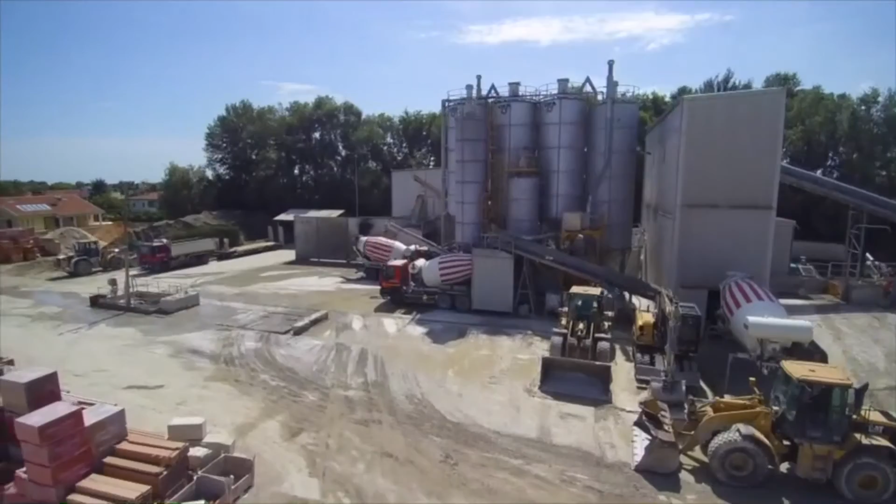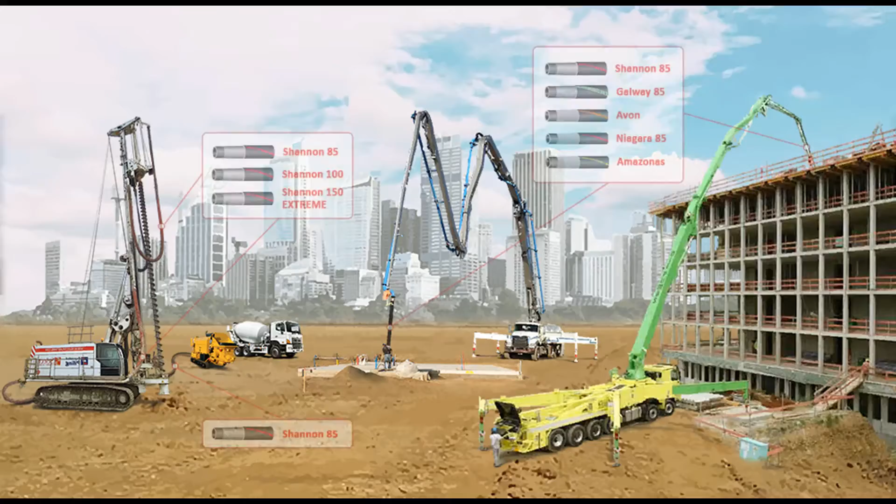Morning, everybody, and welcome to this second appointment with our flexibility project. My name is Claudia Buono, and today, with my colleague Fabio Lazzarin, we'll bring you into the world of construction and concrete.

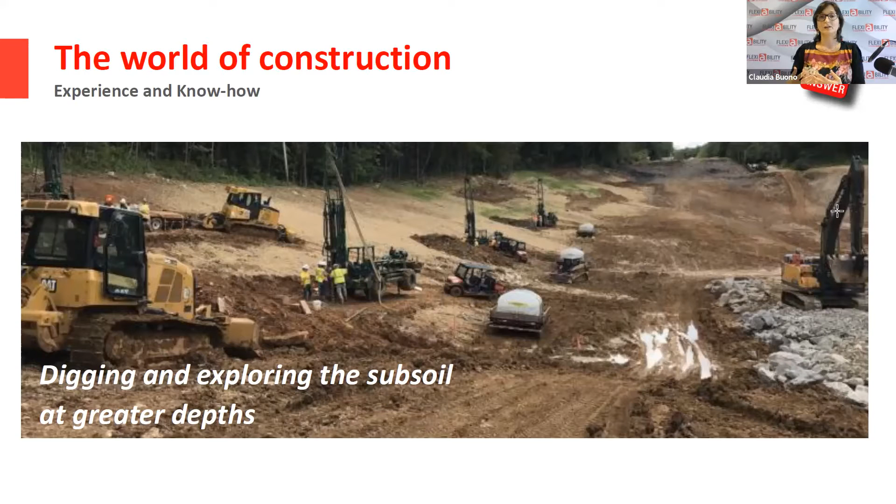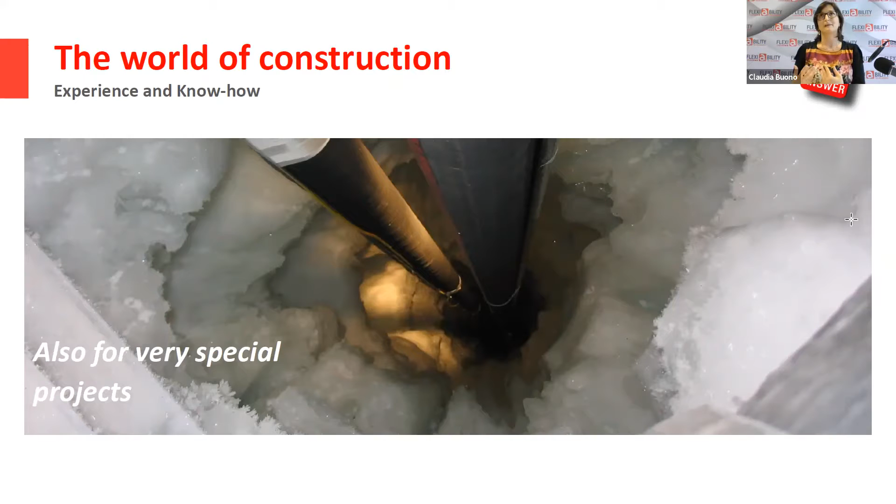So whether you work in the world of construction or not, you have for sure noticed that in the last decades, the tendency on one side is that of building taller and high-tech buildings. But on the other hand, mankind is always eager to explore the dark of the subsoil. To do this, sometimes basic knowledge is not enough, because specific projects, knowledge and know-how are required. For example, the slide you are seeing now shows what we can maybe call ice piling.

So when you think in general about the world of construction, you don't only have to think about simple concrete pumping, but also other applications, like ground foundation, piling, drilling, and to a certain extent also the world of quarries and mines. But this is actually a separate issue. So when we talk about hoses for abrasive material, you don't only have to think about concrete and cement, but an abrasive hose can convey other types of materials, like sand, mixtures of wet and dry materials, drilling mud, chemicals, waste of rocky products and debris, and also compressed air and water. And this is why in a construction field, you won't only find concrete hoses, but also what we call accessory service hoses.

So at this stage, you for sure have understood how important it is to recognize and choose the right rubber hose manufacturer able to grant you the highest quality hose for a smooth and long service. And what are the characteristics this manufacturer shall grant you in the production and supply process? First of all, vertical integration. It should be able to control the chain from the beginning to the end, which means from the raw materials to the finished product. It should be able to produce your hoses in a dedicated department. It should be able to grant you some stock, because we all know how demanding construction people are, and when they ask for a hose, they really need it quickly. It should be able to guarantee the complete assembly, therefore not only the hose, but the end fittings and the safety systems, if any. It should grant you the possibility of customizing also small batches.

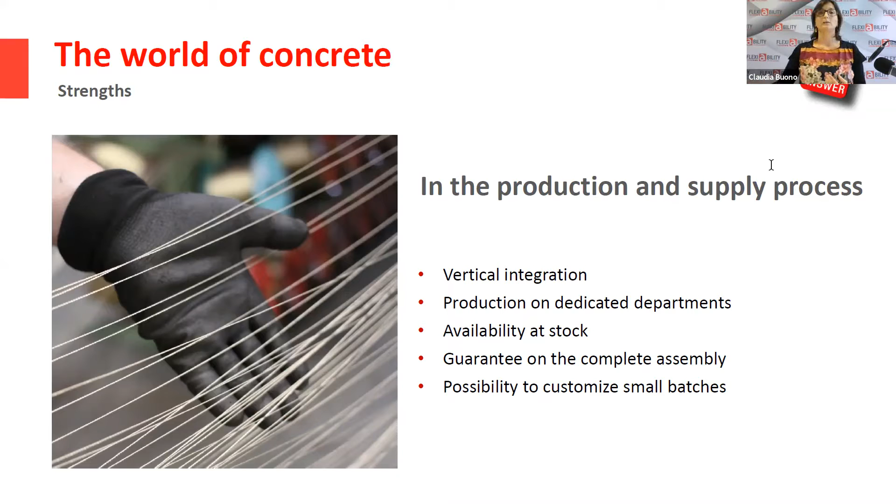And what are the characteristics of a good abrasive hose? First of all, it has to be long-lasting in order to avoid wasting time and money. It should be easy to handle, but at the same time very flexible, because it must ease the worker's job on the field. Third, it should be resistant to pressure, but at the same time provide stability, in order to avoid the incidents that may occur on the field. Fourth, it should have a specific high resistance of the inner tube, suitable to convey a specific abrasive material.

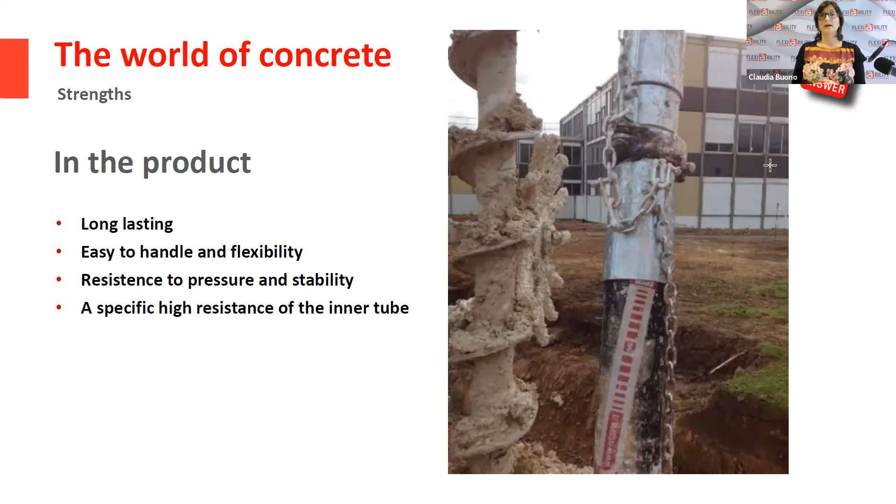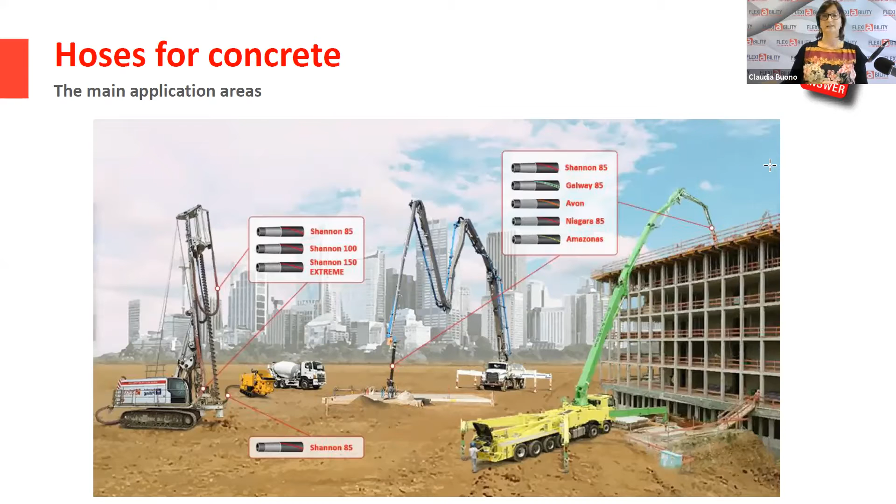You for sure have recognized, I guess better than I do, this slide showing a concrete field and the main applications you can find in it. Fabio will explain this slide in more detail later on. But first, please don't miss the interview of Elisa and Antonio with Nicola Donà. We will be back then for the final questions.

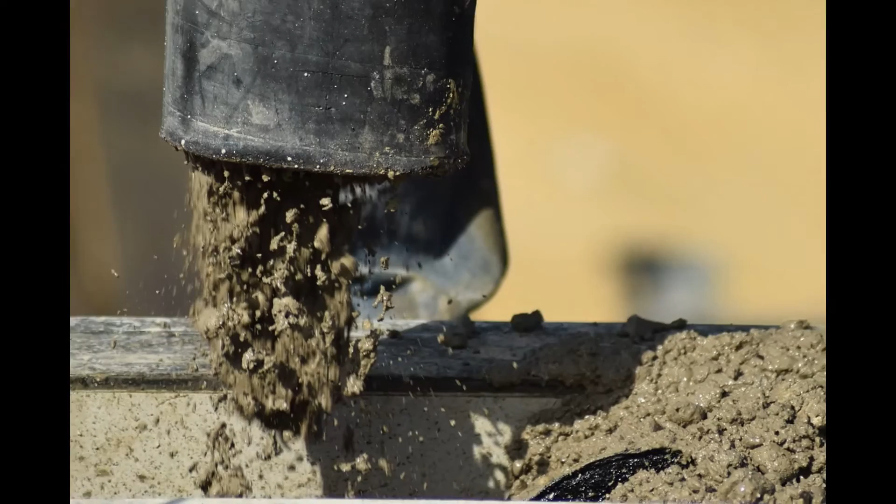Now it's my turn to speak about the concrete hoses. Concrete hoses for a very concrete world, where it's always a matter of making the right choice, and possibly in the shortest time. What we are gonna do now is have a glance at the two main applications where these hoses may be found, that is concrete pumping and piling and foundation. Then we will move forward and see how to choose the right hose for both.

The choice is yours, the choice is your company's, but what we can see is that four main needs lead to taking the decision and having very good and reliable hoses.

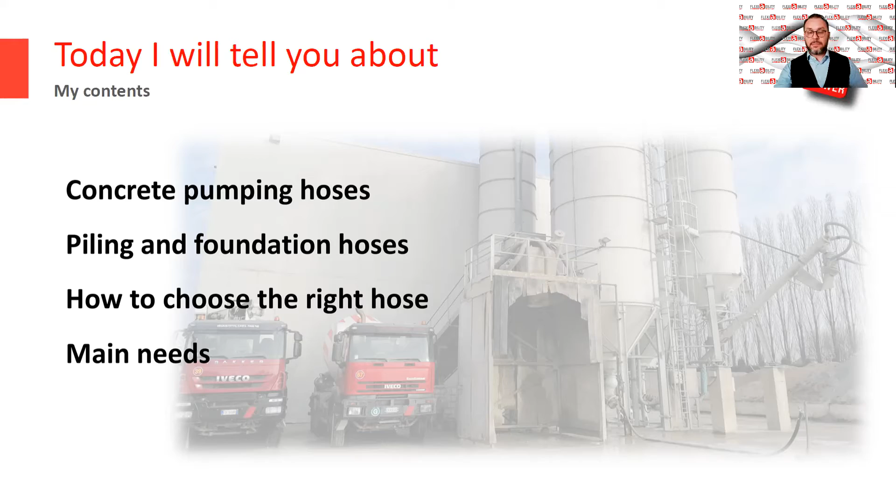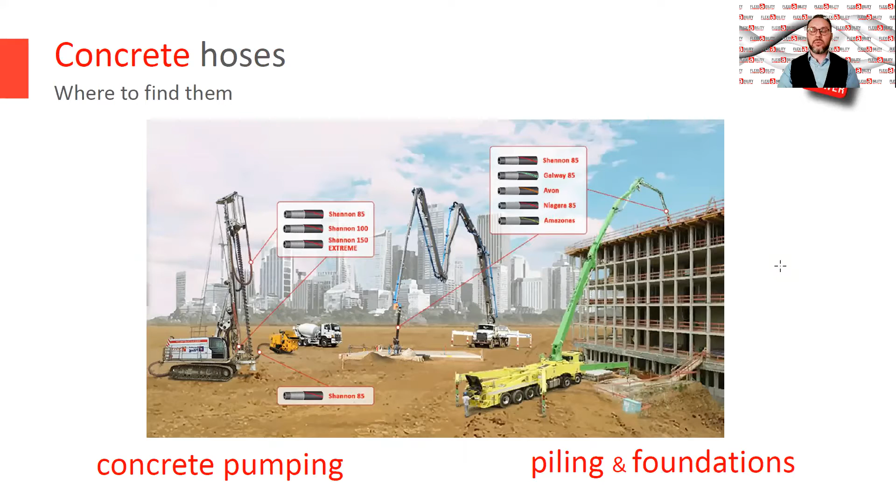But let's start with a picture of a construction site where the two applications are shown with the set of the machines involved for both and with the range of concrete hoses that IVG can propose. Yes, because in a construction site you can see a lot of hoses, but how to detect and choose the right one?

Let's start with concrete pumping. Usually, the most common hose that you can find is a steel wire hose with a working pressure of 85, 100 bars and a burst pressure of 200 bars. In some cases, you may find manufacturers that propose a burst pressure of 170, but I think that it is a limit for safety of the workers, and also a sign that reveals that the hose has not all the characteristics that make it the right choice, especially because the structure is not the same.

For this application, what is very important is that the hose keeps being steady, and there is no bending all along the hose. And this is specific of a hose whose material and process of manufacturing are under control by the manufacturer. Another important feature to be taken into account is the full vacuum in order to grant the operators with structure and hoses, enabling to perform the reverse pumping cleaning.

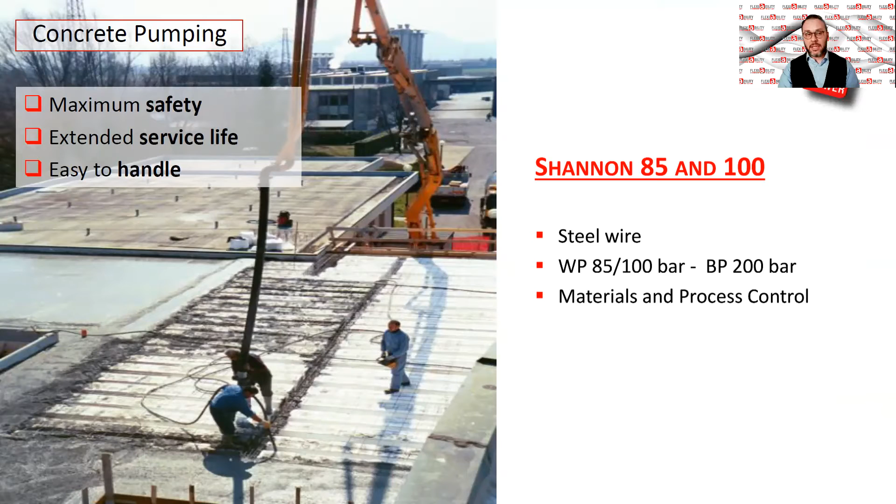Another kind of hose, typically used as a boom hose, is a hose with textile reinforcement, always with a working pressure of 85 bar. But in this case, the burst pressure is lower. It's lower because it is 170 bar. This is due to the specific nature of the textile reinforcement that cannot grant the same strength and resistance to the pressure. But once again, what is very important to ensure these parameters, these values, is that your manufacturer has under control all the process.

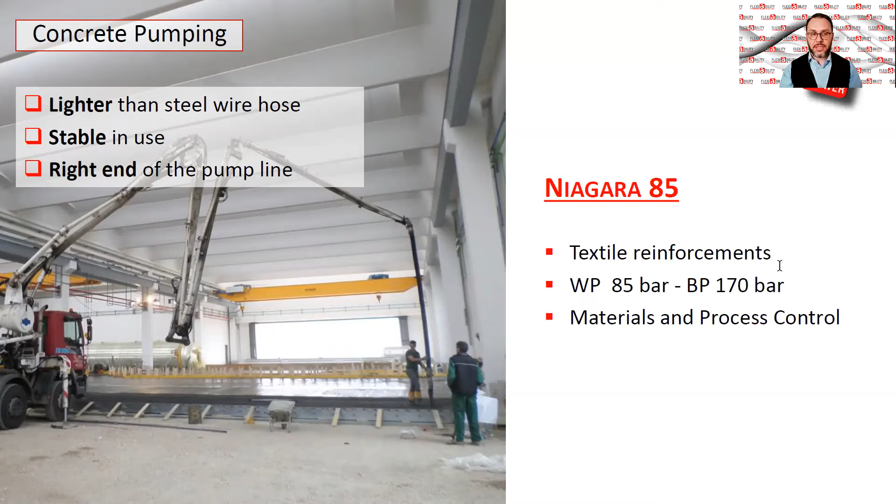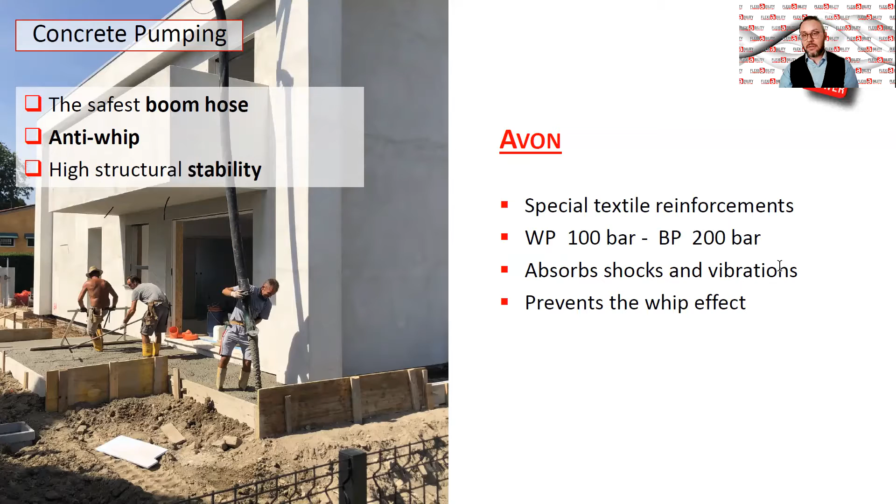Having under control all the process means that the manufacturer can also design a specific structure going ahead and propose something that is very useful for your purpose in the field. A typical example of this is a specific hose with a special textile reinforcement, in this case enabling to withstand a 100 bar working pressure and 200 bars burst pressure. But what is typical of this kind of structure is that they absorb shocks and vibrations. That is, they prevent the whip effect, one of the most dangerous effects that may occur in a construction site.

But this is not enough. Your customer, the workers working with a concrete hose, must rely on the entire assembly. So the working pressure and the burst pressure, whatever it is, even more than 100 bar, have to be respected by all the assembly. So also the couplings are involved. How to see if a coupling is a good coupling? Once again, if the manufacturer has the control on materials, the materials the couplings are made of, and all the process of manufacturing of the couplings, but also assembling, you may be sure that you have a good hose and a good assembly.

Another typical sign of process control is that your manufacturer may propose several types and sizes of couplings, and all of them must be hardened and possibly galvanized in order to avoid weak points and also the rust. But what is very peculiar and essential is a reliable, a real full flow system. Because, as you know, this may enable your hoses, your assembly to have a longer lifetime.

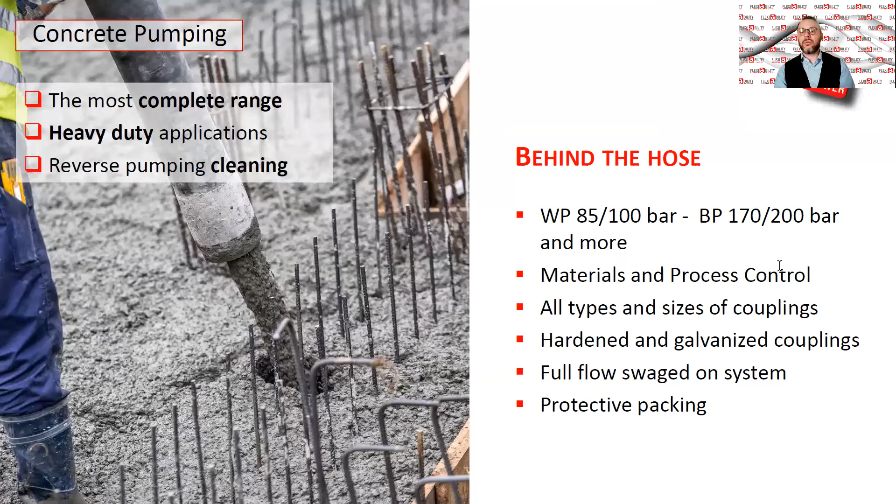And to have a longer lifetime, it is also necessary that the hoses are protected, the assemblies are protected. So there are very specific things that may be done in order to prevent all kinds of damage during deliveries of the assembly, but also while the hoses are stored. And this is true also, even more, for the piling and foundation application.

In this case, there is only one type of hose involved, a steel wire hose with a structure withstanding 85 or 100 bar, even though we know that it is difficult to achieve this kind of working pressure in service. And always the burst pressure must be 200 bar. The structure of these kinds of hoses is special because there are not only the issues of the concrete pumping application, but also the mechanical stresses that these hoses are submitted to, because we are talking about a line of several assemblies, or just one hose on a length of 15, 20, 30 meters.

So you must have a flexible and reliable loop hose, capable to withstand the torque, capable to withstand the movement up and down of the drill, and with an excellent bending radius. That means no kink. So the flow of the concrete is not stopped during working.

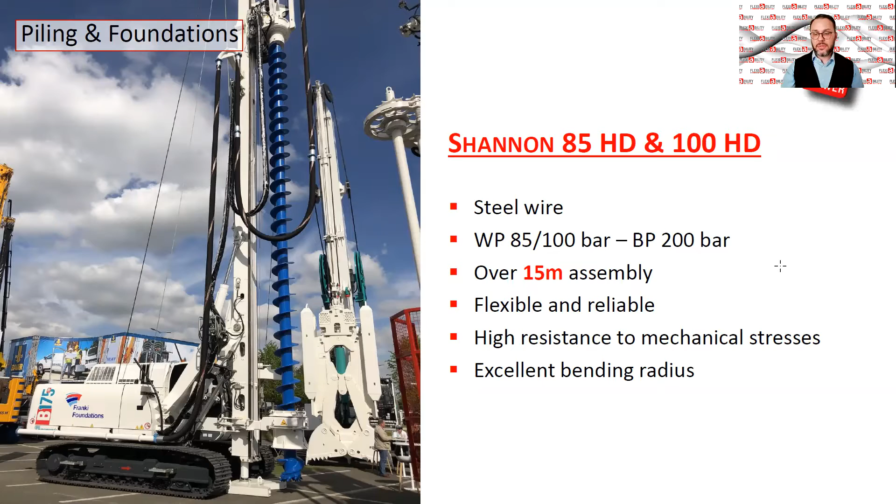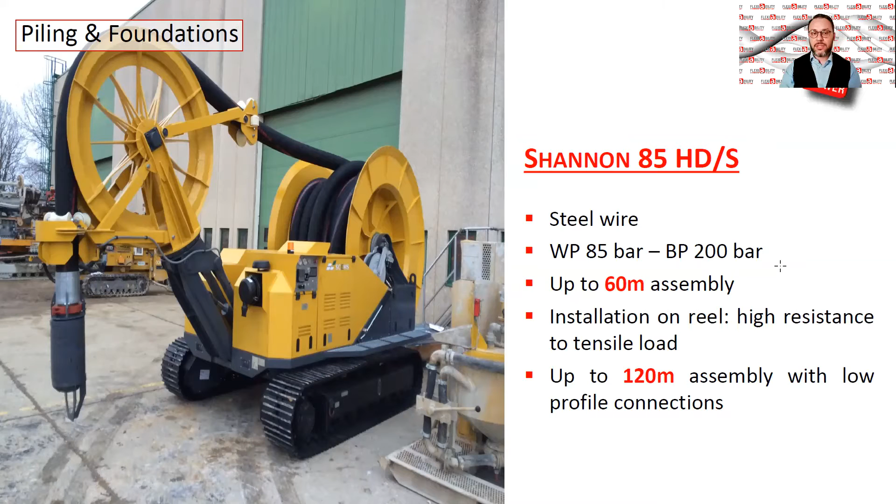In this case, the mechanical stresses involved are even higher than the previous one, because as you can see, there is the torque, but there is especially the tensile load due to the hose rolled up on the reel and applied on the idle wheel. What is very important in this case is that the structure not only withstands the working pressure and the burst pressure, but also withstands the weight of the hose and all the forces involved.

And once again, it is not only a matter of hose. The control of the materials is critical and mandatory, and also the process control for assembling. Even more important is the choice of materials and type and size of couplings, as well as their nature. That is, if they are hardened and galvanized, you can have a more efficient hose and assembly. And once again, in order to end your work in due time, a full flow is absolutely necessary.

And if the manufacturer also manages some accessories for these assemblies, it is better for your work, because you have a unique solution from a unique supplier in terms of accessories, but also in terms of security systems, such as the case of IVG with the integrated system involving the couplings for safe applications.

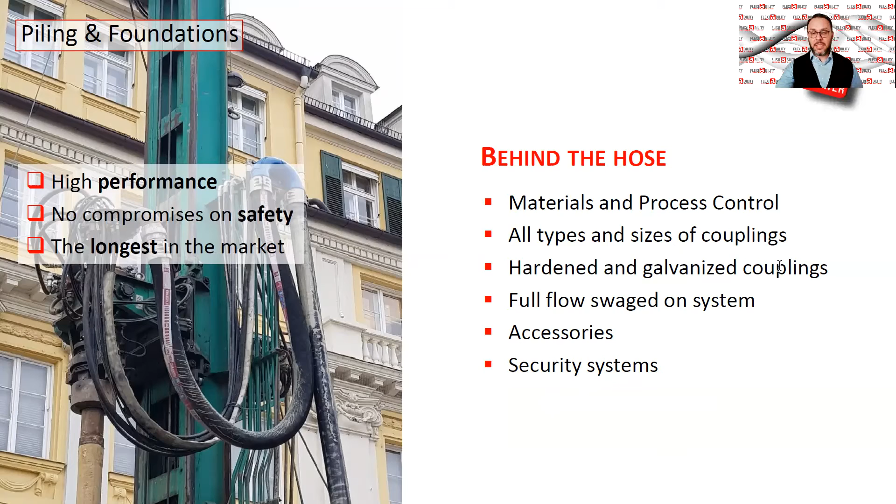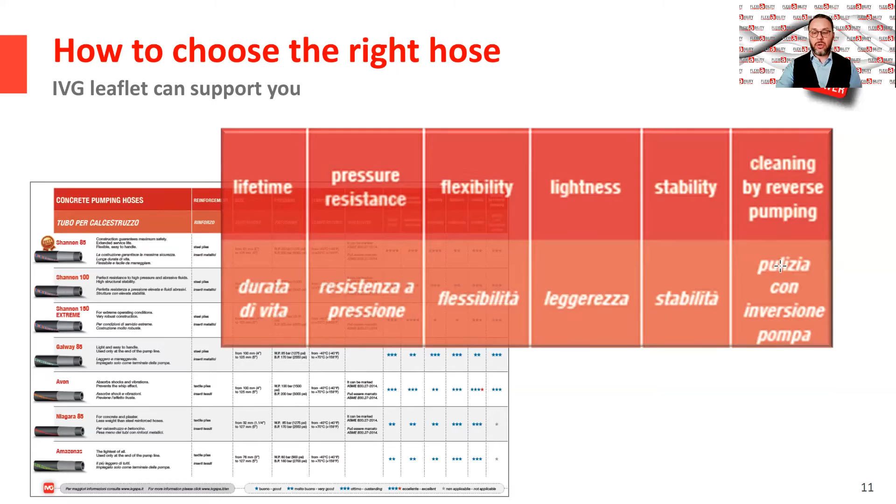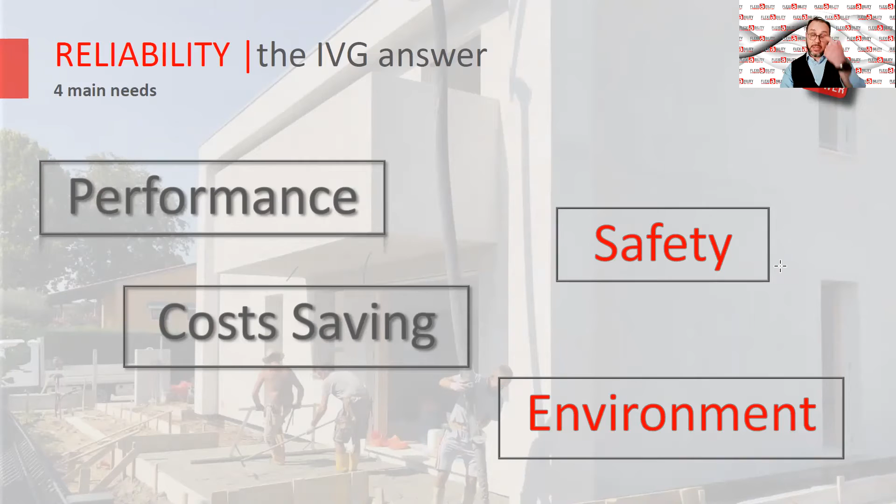But what are the four main needs that lead to a choice? These: performance, cost saving, safety, and environment. These are some criteria that you certainly adopt, at least one of them, while choosing a hose. Performance is probably the first and related to all the other ones, because if you have an efficient hose, you can have cost saving, safety for your workers, and also a lower impact on the environment. But let's see what this means.

Performance: you can achieve a good result in performance, quick casting, and very reliable hoses and machine process, if you have a hose with specific rubber compounds, specifically designed to withstand the abrasion of the concrete, but also the chemical substances that you can find in modern concrete. The structure of the hose is important for good performance because you have to rely on a hose always withstanding the working pressure, even when the components, specifically the lining, are a little worn out during working.

Another important point for performance is bending radius: if you have a hose with good flexibility and bending radius, you avoid kinks, so the concrete flow is better, and your operation will last a little less. Then, very important, the couplings, as we said earlier, and the real full flow, in order to avoid any lack of pressure and to keep your hose very efficient.

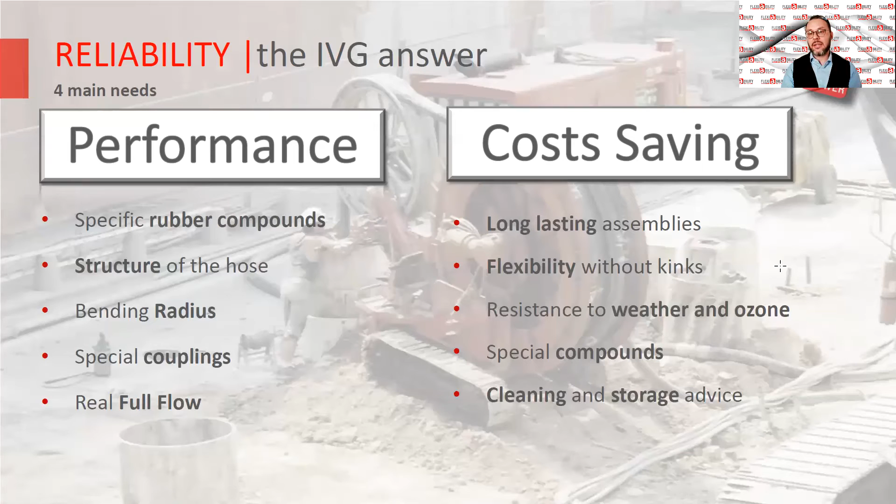And another important thing for IVG, one of the IVG answers to choose the right hose, is also to accompany the supply with some advice about cleaning and advice about storage that you can find in our data sheet.

And then we move to safety. This important word for a construction world, very typical, even more important than in the other fields, because the life of human people is involved. So what IVG does, what IVG recommends about safety for users.

IVG recommends to use a hose respecting working pressure and burst pressure in a regular way. I mean, your supplier should guarantee you that the first hose and the latest hose supplied have the same characteristics and withstand the working pressure and the burst pressure.

Also, as I told you, in order to improve the safety of the workers, you can select some special structure, anti-whip, or some specific special couplings and safety systems, containment, but not only. These are all elements of a manufacturing process and a proposal under control.

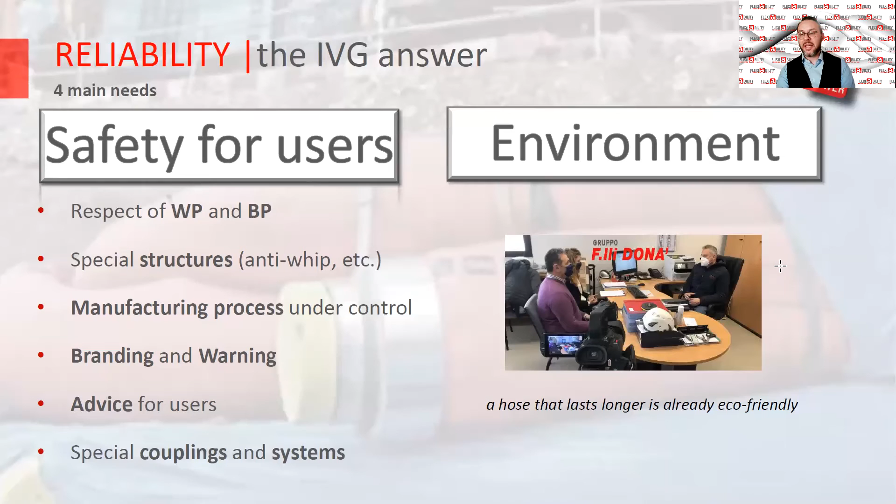As to the environment, I just wanted to remind you what Nicola Donà has told earlier during his interview. There is no need of more comments or further words.

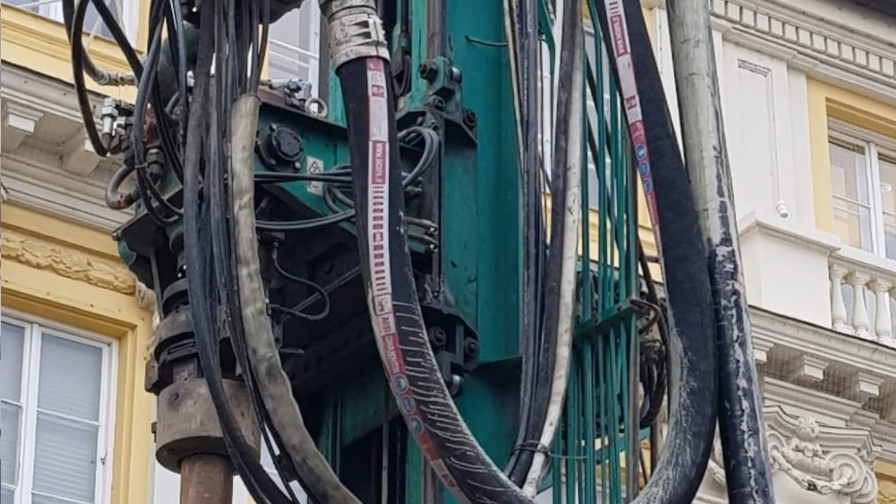Second, Juan is asking if we have hoses with a working pressure higher than 100 bar. The answer is yes, we do have. It is our Shannon Extreme with 150 bar working pressure, and it is for special stationary pumps. You can give a look at our technical brochure. If you don't have it, leave your email address and we will send some copies of it.

We have now time for a last quick question. And Leo asked if we have particular suggestions for maintenance and cleaning of concrete hoses. Thanks, Leo, for this really important question, which actually requires more time than what we actually have, unfortunately.

As you might know, typical failures of concrete hoses occur when the hose has not been duly cleaned. So we suggest to clean the hose. Of course, the best would be to clean a hose after every application. We, of course, understand this is not possible. So we suggest you do it at least at the end of the day, once the operations of the day are finished. And you can maybe reserve some time for hose cleaning.

To do this, you can use special rubber balls that we also have available. And that's all. This short operation will prevent premature failure of the hose itself, caused by the build-up of the concrete inside the hose.